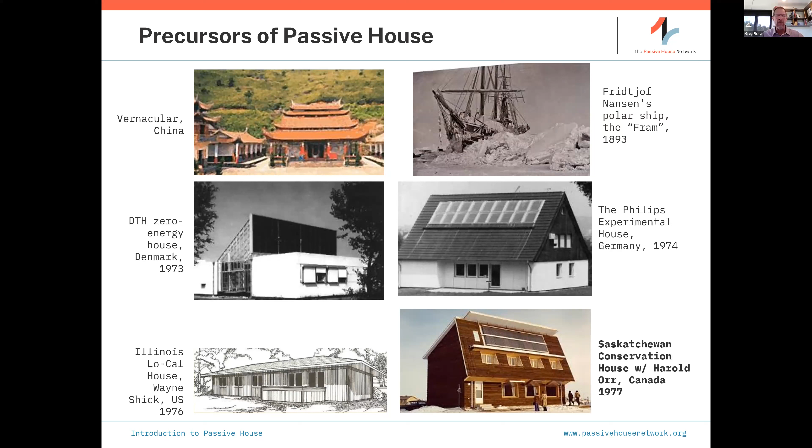The story goes that Amory Lovins from the Rocky Mountain Institute visited this building and provided the insight that these new developments could be standardized and scaled to great effect on the building industry. And from that time on, the Passive House Institute has continually conducted research, developed tools, and worked with industry and government partners worldwide to make passive house buildings the new normal.

So what changed? What was the discovery of this passive house experiment? What flipped in our thinking? What came out of this research was the essential power of the passive house concept, that despite our focus on energy efficiency and seeing comfort and health as a result of efficiency as side benefits, it is instead the focus on occupant comfort and health that drives performance. In other words, it starts with the occupant.

Per the purely functional or idealized definition as it was distilled, quote, a passive house is a building for which thermal comfort can be achieved solely by the post-heating or post-cooling of the fresh air mass, which is required to achieve sufficient indoor air quality conditions without the need for additional recirculation of air.

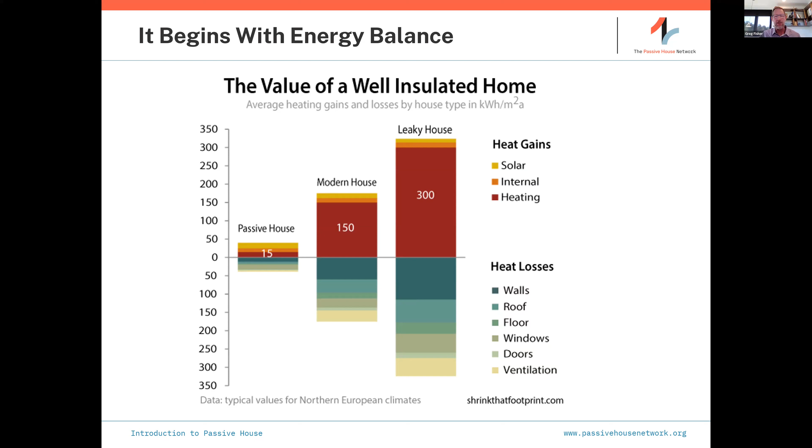In the old, very leaky and moderately leaky, shall we say, homes, large active heating systems are required to bring the building into balance, as the gains above must equal the losses below. While the passive house building requires a tiny fraction of the energy to be brought into balance. This dramatic reduction in heating and cooling demand demonstrates the power of optimized passive architectural structure and will flip our expectations.

It's like what we've experienced with our computer industry, where computers get ever more powerful while using much less energy. And so too, passive house decouples power from performance. Passive house provides a clear pathway to decouple and frees us to deliver zero carbon buildings today. This is a game-changing thing. Let's look at what passive house delivers now.

The passive house concept starts with the occupant, as we've said, and moves outward. What makes us comfortable? How about steady temperatures? How about no drafts, no cold feet, peace and quiet? How about sitting by the window on a cold winter day and still feeling comfortable like these two girls are?

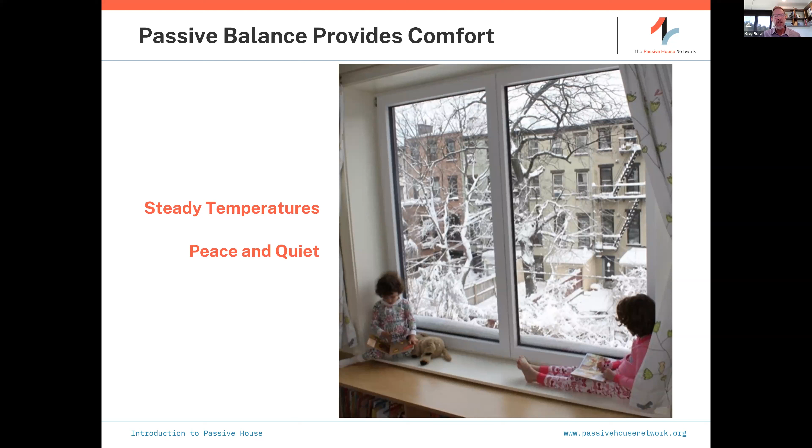Passive house provides hygienic indoor air quality, 100% fresh air and exhaust with no recirculation. It's filtered fresh air, keeping pollution out, no mold and associated illnesses, reduced asthma and reduced allergies.

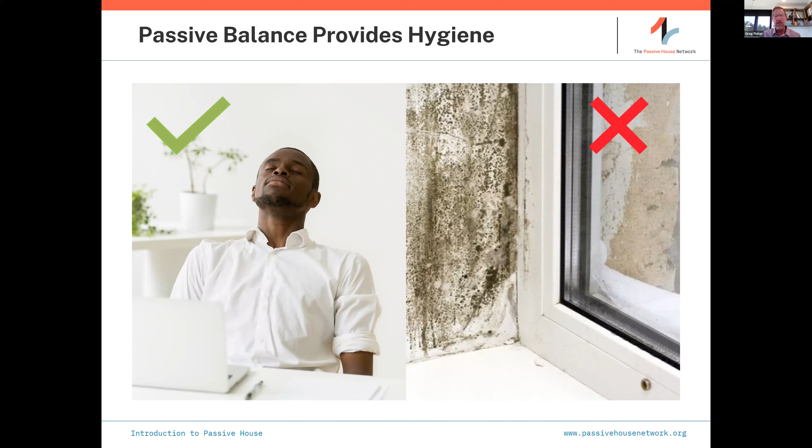Passive house provides resilience that we can shelter in place indefinitely in the winter and in the summer for an extended period of time, long enough for the power company to get things up and running again. And I've personally experienced that in my own passive house where we've had some outages and we've been nice and comfortable here for 2 to 3 days before noticing a problem.

This is an example from a home in Brooklyn, New York, several polar vortexes ago. The black line is the exterior temperature driving down and staying freezing for 4 days. The red line is the interior temperature, not a flat line, but steady. And we see the one moment when the family turned on the heat during the week where there's a bit of a spike.

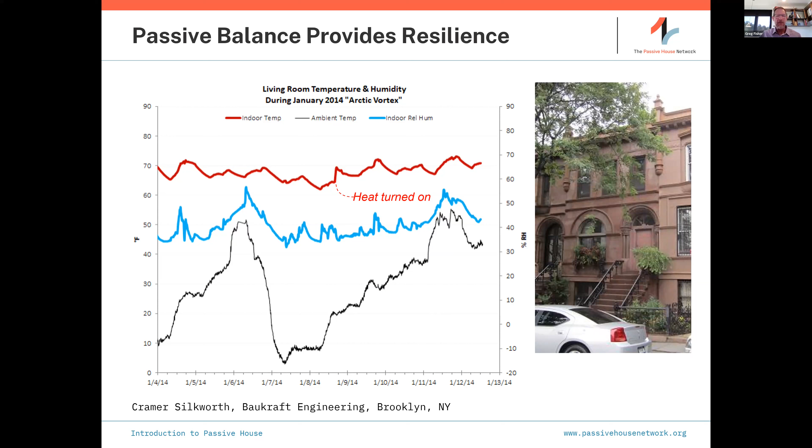Passive house supports our country's transition to a green grid and electrified future. The dramatic energy reduction of passive house makes removing fossil fuels from buildings economical. And with renewable energy options available on-site and off-site, passive house makes grid utilization more efficient and resilient. Consequently, the more passive houses we build, the less renewable production is ultimately needed, making our green transition more affordable and quickly achievable.

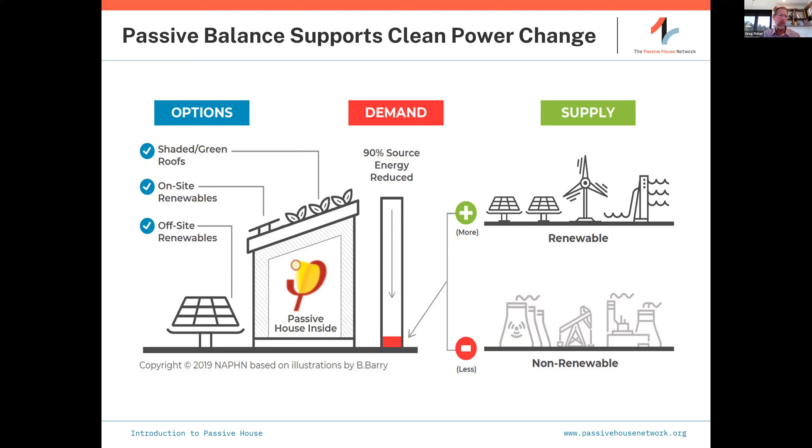To achieve the wide range of benefits a passive house building can provide, passive house doesn't look to more power first to solve problems. Instead, as designers and builders, we re-engage the passive building elements, the architecture, the structure itself, and empower it to do the heavy lifting. As you would first place the fulcrum of a lever in the optimal position to lift a weight before applying power to lift it. In our case, think of the enclosure as the fulcrum, and how we formulate the enclosure, like the placement of the fulcrum, has an equally profound effect on the power needed to provide comfort and health.

This flips our business as usual thinking. Consequently, Passive House makes us think and work differently. Passive House asks us to question everything, to effectively restart, like going back to the ancients. How do we optimize and empower the elements to do this heavy lifting?

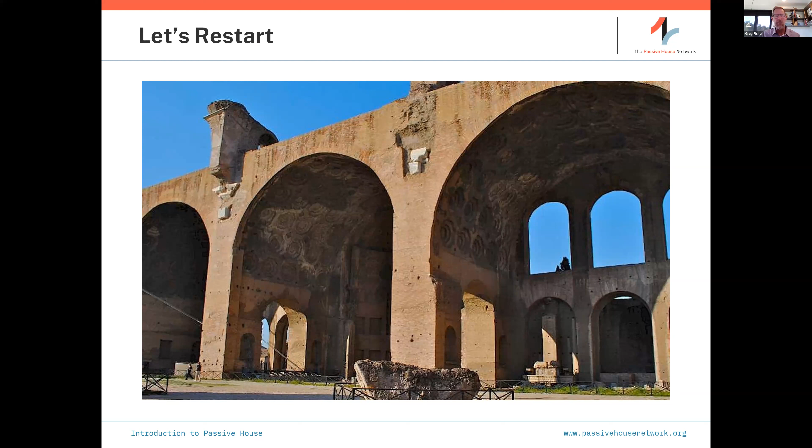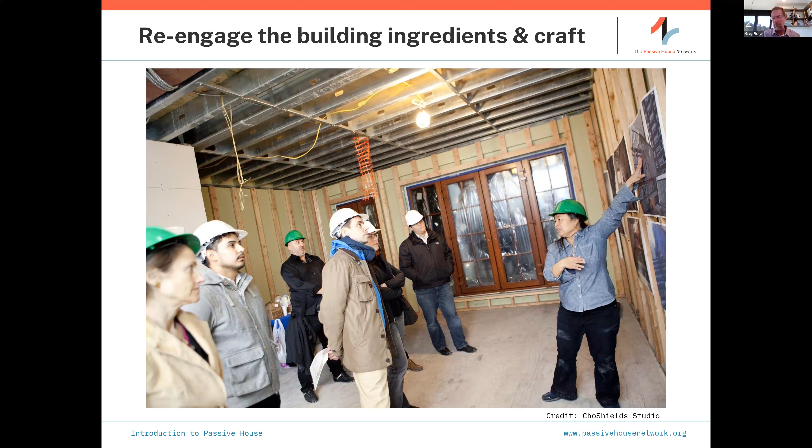And this goal, the quest of unlocking the power of the passive building structure, re-engages our focus with the ingredients, the recipes, the materials, the details, and the craft of building. It empowers and energizes the project team, from the owners to the designers to the builders and construction site laborers alike. Nothing is taken for granted. And this quest for passive building power has us designing and building with the energy flows and energy balance, not as far off abstract concepts, but instead as active tools that inform everyone's work.

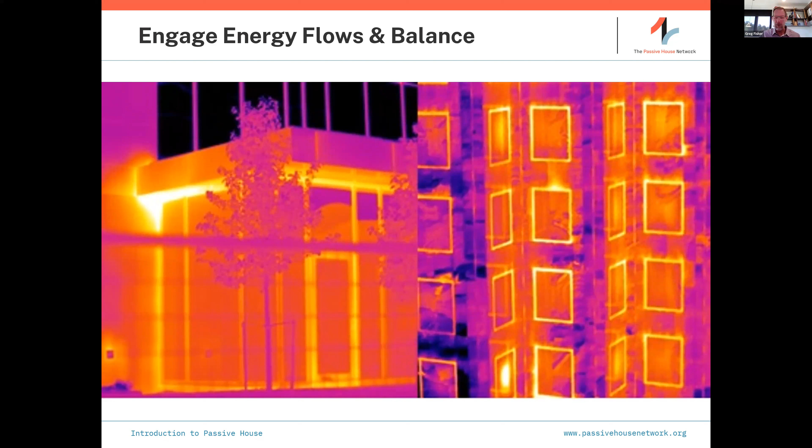And once we've decided to grapple with the idea that our architecture can produce such profound and far-reaching results, the challenge is really a simple question. Do we have the imagination? Do you have the imagination it takes? Don't be deceived by what you may or may not think is possible. Passive House is just starting.

And of course, there is housing. There's an affordable housing development in Norwich in the United Kingdom that won the Royal Institute of British Architects' highest award, the Stirling Prize. So here we have affordability, performance, and architectural design that is recognized all in one package. So with these few examples, I hope we can shake off any of our residual self-imposed artificial limits on what's possible. Passive House is no more a constraint to great design than any other programmatic element you're tasked with delivering.

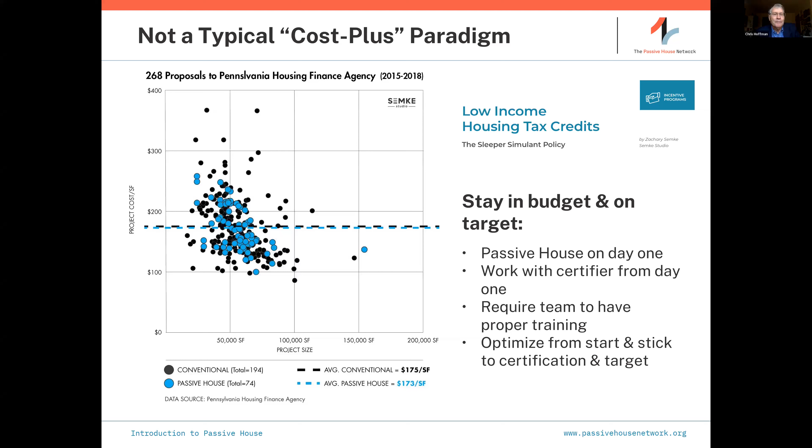So how is this possible? Easier said than done, right? May seem impossible on its face. I mean, how can you be at cost parity or close to cost parity and have all these amazing benefits? The key is predictability. You can fully optimize the performance and economics if you have a strong sense of predictability, if you can calculate accurately and execute to a clear plan.

So the Passive House Institute didn't just give us this new concept and say, hey, go to it, good luck, but instead provides a pathway, a methodology, and a wide growing number of tools to enable predictability. Building certification is critical, but there is much more to it. There are component certifications of essential components like windows and ventilation units. Be sure to check out the database of thousands of certified components on the Institute's website, and critical personnel certification on the design and construction sides.

The PHPP energy model, PHPP standing for Passive House Planning Package, it's an active tool in the design of the building. Reference materials abound from the Passipedia, the building database, and other corners of PHI's vast website. And PHI conducts ongoing cutting-edge research around the world with new uses, climates, new technologies, and new methodologies.

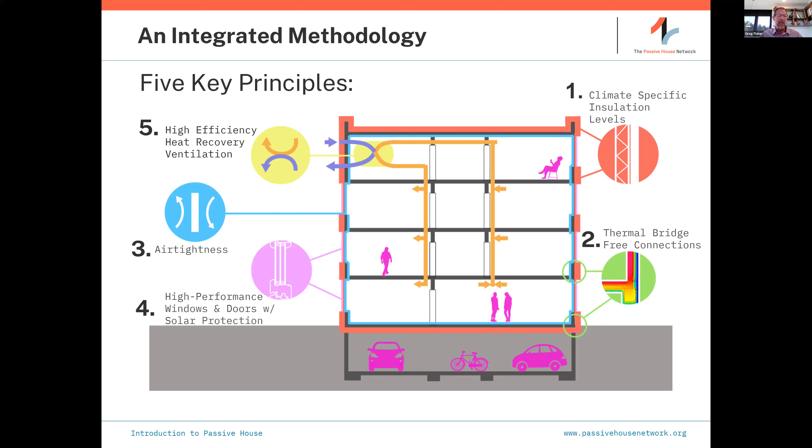We'll look at air tightness, high performance windows and doors, and high efficiency heat recovery ventilation. These are key ingredients or principles of passive house. These key areas and more are all entered into the Passive House Planning Package, or PHPP energy model. The PHPP is an Excel-based tool which allows the designer to simulate the behavior of the building both during peak times, winter and summer, and over an entire year. This flexible model allows for quick iteration and design alternate evaluation.

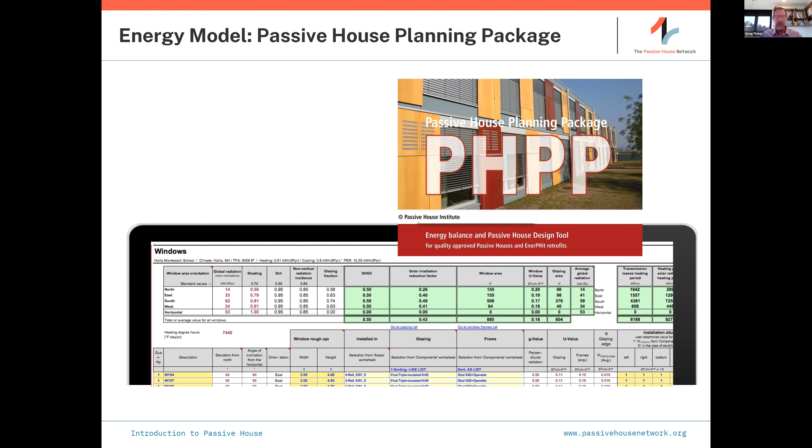The PHPP and all other simulations should be implemented not just as compliance tools, demonstrating that the building meets the standard, but as design tools which allow the team to iterate and evaluate a host of ideas and options, real-world assumptions, and possible future scenarios. This doesn't mean that the PHPP controls the design, but rather that it helps to inform the design with performance data throughout the process. This is the essence of data-driven design, frankly, of good design.

Greg, here's another question that's come in. It says, I understand that there is an international design code for passive house design, but that it's rather rigid and difficult to implement. Is that true? And do you advocate adhering to that code, or are you in favor of other less rigid design principles? I get concerned about resistance to requiring another building code.

Yeah, legitimate question. What I would first say is that Passive House does not mandate how you build. Passive House mandates how the building will perform once you have built it. So there are many, many ways to skin the cat of creating a Passive House certified building. You just have to live up to the performance criteria, which has to do with the amount of energy consumed for heating, the amount of energy consumed for cooling, how airtight the house is, and having the house properly ventilated so we don't have sick building syndrome from folks getting sick inside.

So when I think about the question being about this as a building code, I don't see it as a code. I just see it as a performance mandate, and there's many ways to get there. Not to say that there aren't very good and impressive buildings being built that are not built to Passive House standard, but I believe the Passive House principles are very important in achieving.

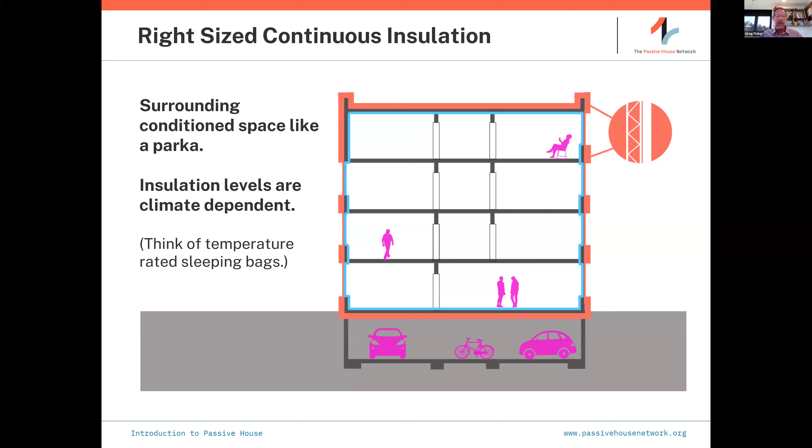Second principle of Passive House then extends this thinking to make sure we don't have breaks in the insulation. In typical construction, thermal bridges may not seem important in isolation, but they can completely undermine the building's performance when you add them all up. If we think of a thermal bridge as a cut, your project can easily die from 1,000 thermal bridge cuts, so to speak.

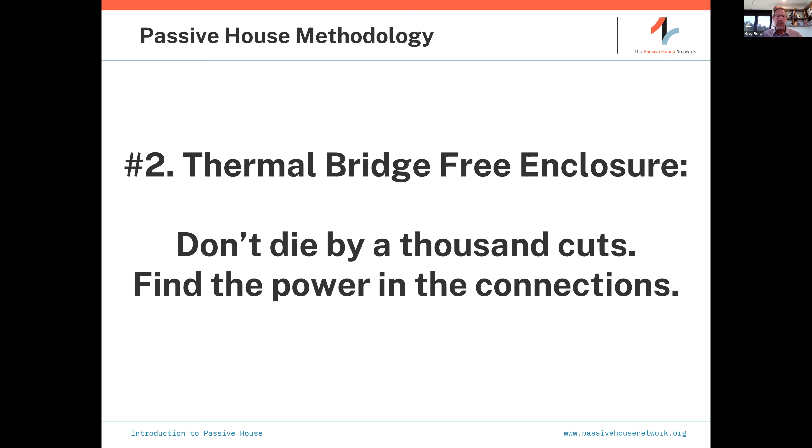Here's some examples of thermal bridges, and they abound, but the thermal image on the lower right shows the common balcony connection, turning the building into a radiator to the world. So what you're seeing there is basically the heat being conducted out of the building and into these balconies and then radiating out. The colder interior surfaces can cause condensation, as we can see on the window frame in the upper right, and worse yet, mold on the left.

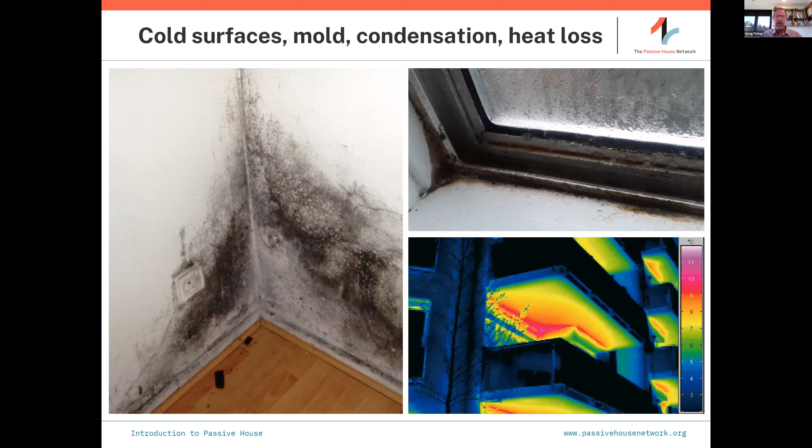To overcome these issues, typically we overheat, treating the symptom with brute force. With Passive House, we first avoid the problem in the first place rather than treat it. Thermal bridges typically occur at junctures where the floor meets the wall or wall meets the roof, or at window frames meeting walls or balcony connections. The energy loss causes thermal discomfort and condensation and moisture damages.

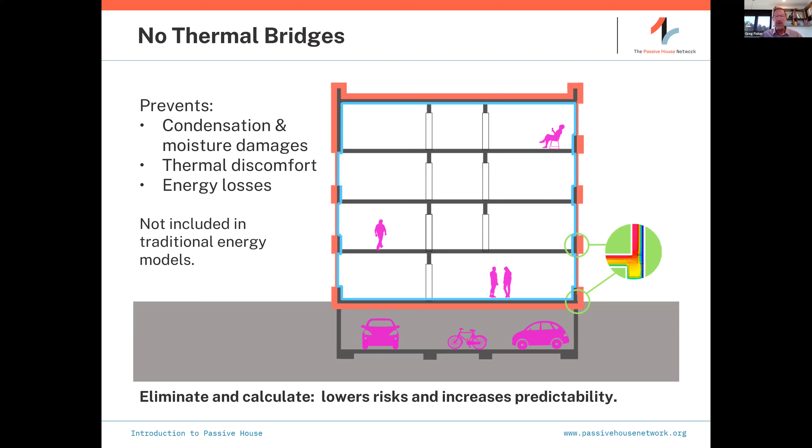Traditional energy models don't account for thermal bridges, and this is a big contributor to the oversizing of mechanical systems, just to be safe, so to speak. In Passive House, we look carefully at all of these connections and junctures, working through the construction details, and eliminate the thermal bridges entirely or minimize and calculate them if we cannot eliminate them. We include them in our PHPP energy model, and this results in increased predictability and produces lower risk construction.

The third principle is an airtight enclosure. And while when the subject comes up, people might reflexively clutch their pearls and worry about poor indoor air quality and perhaps succumb to nightmarish imaginings of not being able to open windows, we need to set the record straight at the start. Two concepts are in play: quality indoor air and our freedom. And so we need to flip the common and wrong-headed thinking on both.

First, let's address quality. The fundamental idea at work here is that it is very difficult to control the quality of something if you don't first have control of the thing itself. If the enclosure is leaky, the polluted outdoor air is moving willy-nilly through the building. Consequently, the only way to have any sense of control is to overcome it with power, never sure if this space or that space is properly ventilated, like thermal bridges where we're treating the symptoms with more brute force. But in an airtight environment, the air is under control and we can very differently and confidently maintain its quality. Airtightness sets the table for healthy indoor environments.

But you might say that's all well and good, but the passive house police won't let me open the windows. It's fascism. Quite the opposite. Of course, there are no passive house police. You can open the windows, but let's think about it. You often open the windows when the indoor environment feels unhealthy and uncomfortable, and you need the fresh air. It's not a want, it's a need in those cases. But in a passive house, you have clean, fresh air, whether the window is open or closed. You don't need to open the window. You open a window because you choose to. It's a lovely day. Open the windows and let the breeze blow through. How nice is that? Passive house is actually giving you the freedom to choose.

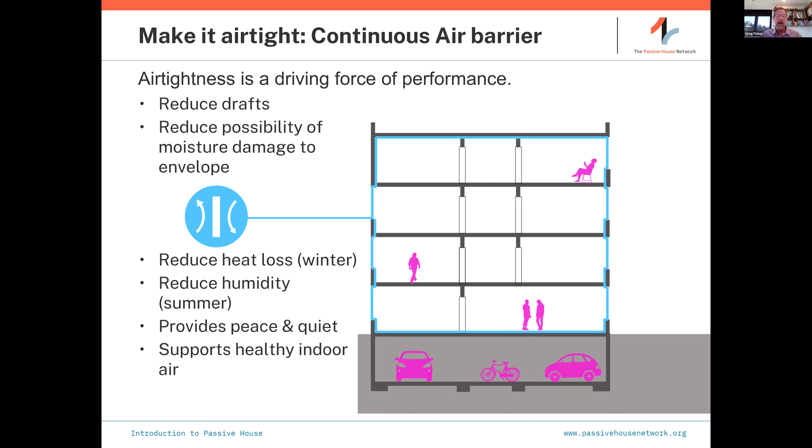And in hot, humid climates, airtightness keeps the humidity out and reduces the demand for dehumidification, allowing the cooling system to be sized mostly for cooling as it should be. For all these reasons, the truth is that a building can never be too airtight, and passive house takes full advantage of this truth.

Fourth principle is high performance windows and doors. The flip here, as we spoke in the beginning, is to rid ourselves of the unfortunate association people make with passive solar buildings. And we must always be on guard to avoid overglazing and the accompanying overheating. The passive solar buildings of the 70s and onward were overglazed, out of balance, and often very uncomfortable. If you can recall, the precursors to passive house in the 1970s were not passive solar buildings. They tended to be super insulated buildings that balance daylighting needs and solar heat gains and losses.

Passive house buildings don't have tiny windows either. We're not building caves. Expansive views abound. We will utilize passive solar heat gains, but we are being very conscious about the energy balance, about solar protection and the consequences. Restraint might be a good word for what we're showing off.

Key concept here is that the windows and doors act not simply as a provider of views and daylight, but they're a critical component in our continuous insulation and air tightness. The windows themselves are often triple pane and truly thermally broken and airtight with 3 layers of gasketing typically. The window connections to the surrounding construction and airtight insulation control layers must be airtight and insulated. Thermal bridge free connections, of course. This all gets you deep into the construction details.

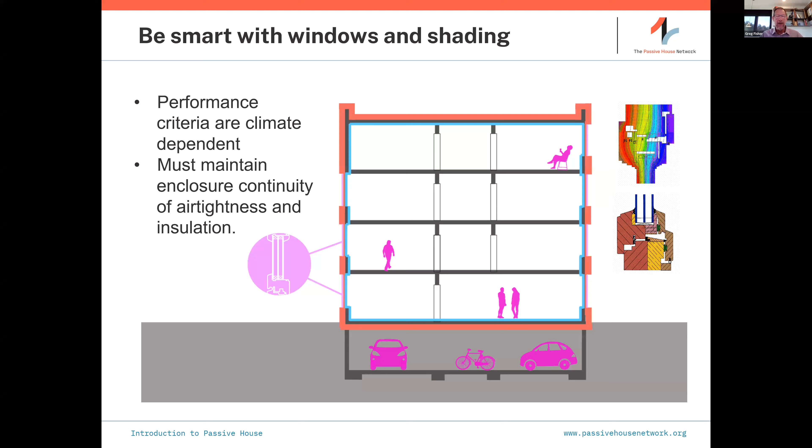Window quality is a primary driver of comfort, of course. And while there are a myriad of factors, the fundamental idea here is that our typical windows, our code windows, result in significant temperature asymmetry. In winter, the window is colder than the other surfaces and you feel it. It causes convective currents, and this needs to be overcome with perimeter mechanical systems. With passive house, the windows are of a quality that the temperature is close enough to avoid discomfort and avoid the need for mechanical systems to compensate for this.

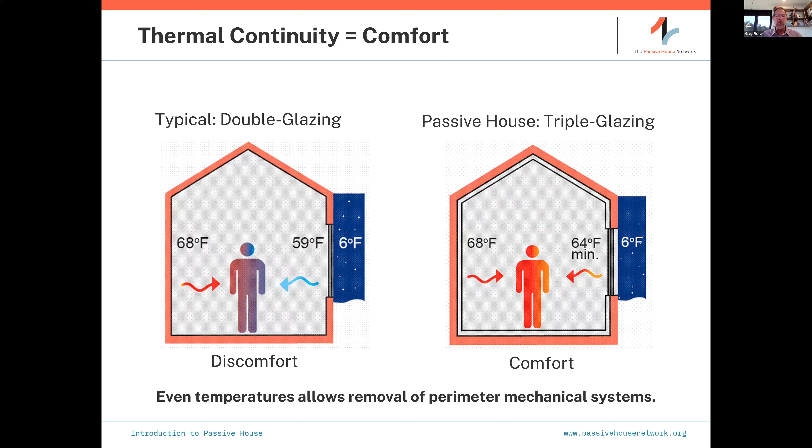Because windows are such a critical component and their performance cannot be compromised, we recommend the Passive House Institute certified windows are the ones that you utilize. Like airtightness, high quality, high performance windows disproportionately affect the overall energy balance performance of the building. They offer greater design freedom, flexibility, and options. They provide value that cannot be appreciated in an isolated budget line.

And while windows provide our views and daylight and yes, useful passive heat gains, improperly designed windows can cause significant overheating, causing discomfort and additional air conditioning requirements. And we know that overheating is a common problem in conventional buildings across the industry today. The best approach to avoiding overheating is to carefully provide proper shading. Shading can be provided by how the window sits in the wall, an architectural element, or using landscaping. Needed shading can be achieved with interior blinds, but exterior shading is the most effective, keeping the heat out. Shading cannot be an afterthought. It cannot be optional. It has to be design integrated.

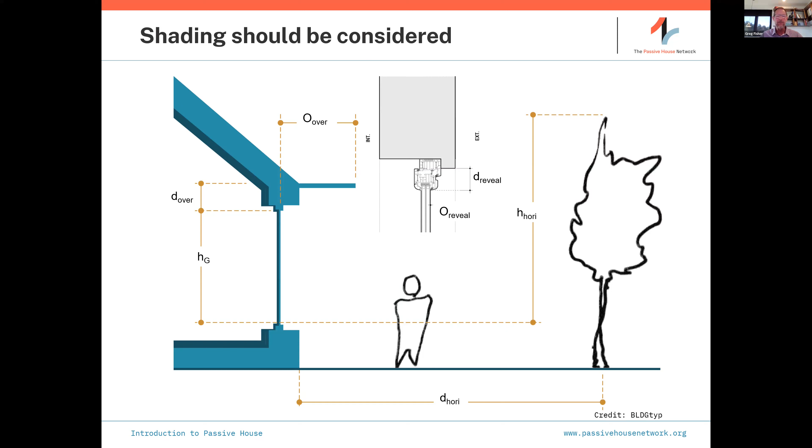The fifth principle is high efficiency heat recovery ventilation. So let's think back to the definition of passive house. The primary goal was to ensure effective hygienic ventilation. Today, and in the recent times of coping with the COVID-19 pandemic, hygienic ventilation has been a hot topic. Add to that the inescapable forest fire smoke and the long history of poor health outcomes for marginalized communities on the fence line of industrial production. And of course, hygienic ventilation should be a foundational goal.

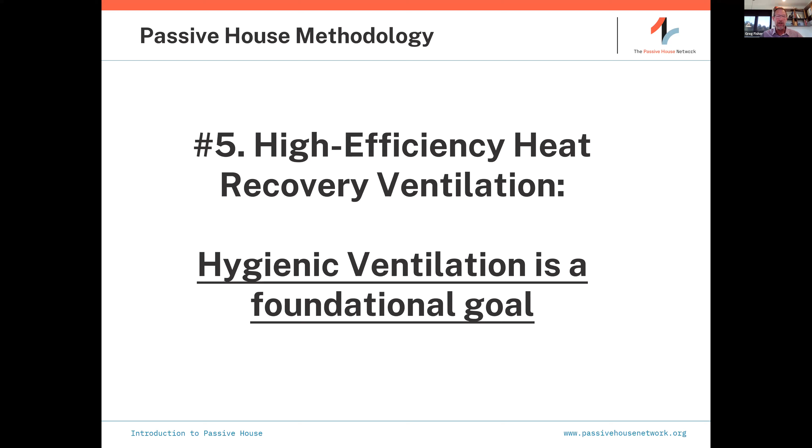And remember also that what is going to set us up here for success is the airtight enclosure. There's no pollution entering willy-nilly as happens in typical construction. We have control of the interior air. Now, typical buildings have ventilation systems, just bad ones, often providing only intermittent exhaust from bathrooms and kitchens that don't ensure good ventilation everywhere. And in commercial buildings, often includes a lot of recirculated air.

In a passive house building, we supply 100% fresh air to every served space, bedroom, living room, office, classroom, etc., and 100% exhaust from every service area, bathrooms, kitchens, utility areas, and this all operates continuously 24/7. The systems are laid out to ensure that all spaces have robust ventilation. Again, there is zero recirculation.

Now, such a system of 100% air changes would normally be prohibitively expensive to operate because typically you need to heat or cool that fresh air to maintain comfortable interior conditions. But this gives us the passive in ventilation because there's a passive heat exchange element located with the fan unit. This allows the heat and energy from the outgoing airstream to move to the incoming airstream. And today, the efficiency of this passive exchange can exceed 90% or more. This means that on a cold winter day, the fresh air supply without any added heat enters the room within just a few degrees of the room temperature, ensuring occupant comfort. And Passive House Institute certified ventilation units ensure that you get the performance and cost savings you expect.

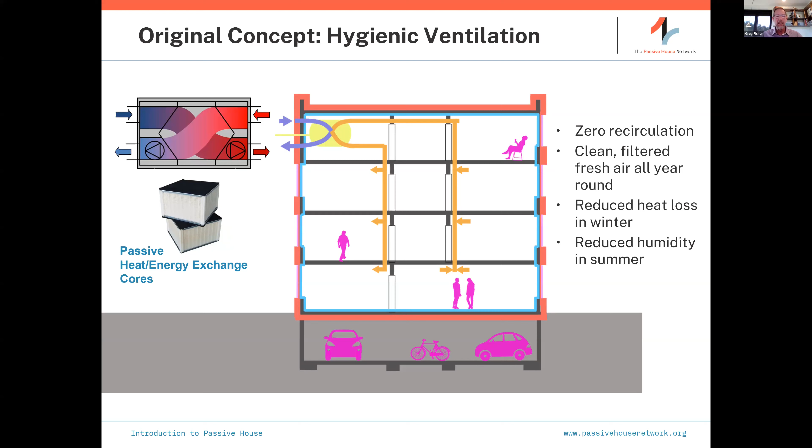In looking at the energy balance of the buildings and the building design, we're also going to look at the things that provide internal passive heat gains as well. Things like people, appliances, and equipment, the lighting and mechanical systems, because they can contribute significantly to providing the heat needed in winter. It all goes into that PHPP model we talked about earlier.

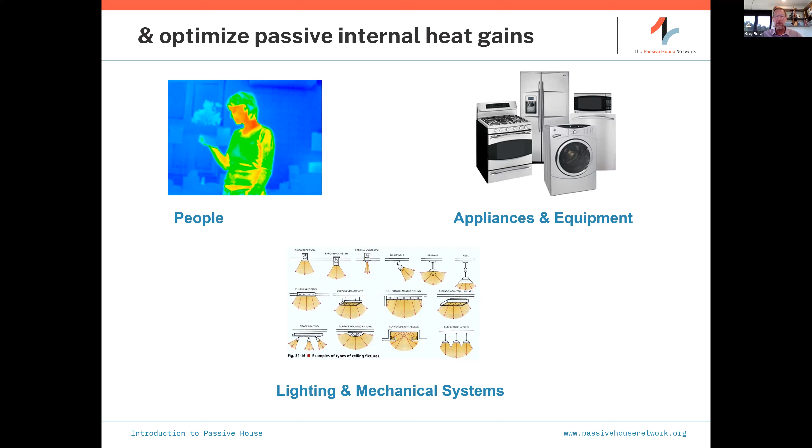So at this point, moving through the building design, the metaphorical fulcrum is pushed as far as it can go. The architectural design and other passive elements are doing the heavy lifting. Like the Gothic cathedral we looked at earlier, the architecture is doing the work again. We've minimized the need for active heating and cooling and dehumidification. But depending on where you are, there will likely be a need for active heating, cooling, and maybe even dehumidification, just greatly reduced. It's important to remember that this is about optimization, not magic tricks.

So what we see is the ability to meet the occupant needs with a 75% reduction in mechanical equipment sizing and up to a 90% reduction in usage of energy. We can pull the distribution to the core of the building, and because the loads are so low, electrifying everything is economical. We can get rid of the hydronic heating if we like and provide heating and cooling from a single heat pump system, as the questioner was asking about earlier.

The only trick here is perhaps getting the mechanical engineer to agree with the plan, because at first glance, they might see a building that will fail. I mean, how could it not with such a small mechanical system, right? It can take a few meetings, but with careful explanations, even engineers who we've seen initially energetically opposed can become ardent supporters. We need all engineers out there on board. We can't do it without them.

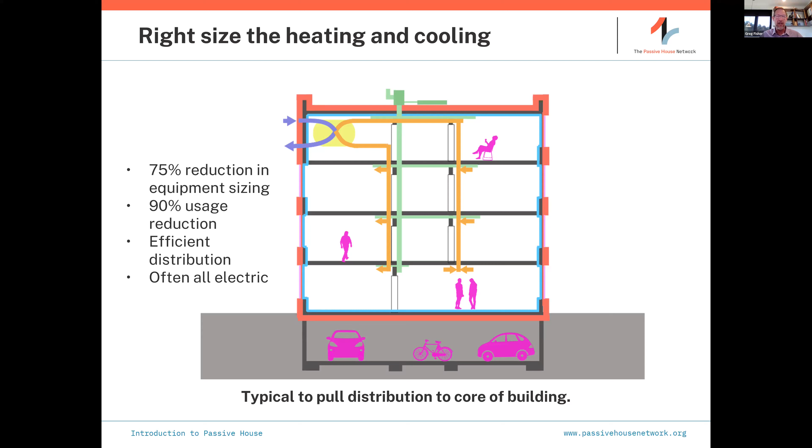And then there are smart systems. Passive house isn't opposed to incorporating smart systems and technology. Even the first passive house had to have a CO2 detector to help control proper ventilation. But the smart system should enhance high performance. They should not be used to compensate for poor performance. So let's make the architecture do the work. Let's incorporate only the most efficient equipment, and let's add smart systems as we like, but always with an eye towards greater simplicity. Let's simplify, simplify, and simplify some more, because our resilience depends on it.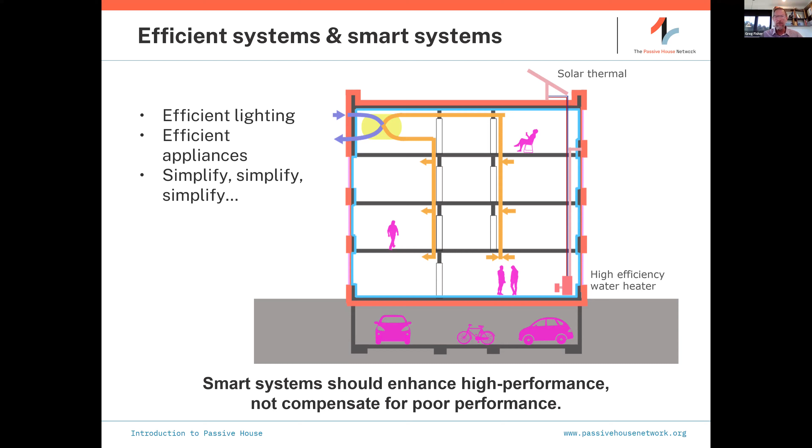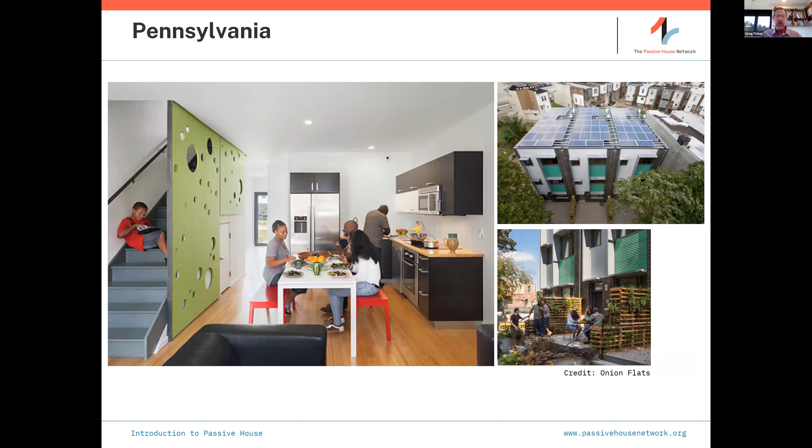So as the world heads toward climate tipping points, and we plainly see the interconnections of these crises, let's have the imagination and determination to seize the inherent power of building and really leverage it, so that we can confidently deliver better health outcomes, support greater equity, and deliver climate action proportionate to the emergency.

We see the push to zero carbon emissions on the horizon across the board and coming at us fast. Let's not wait another day, but instead let's set ourselves up to meet that world by building passive house buildings now. So are you thinking differently? Are you ready to act? I hope so. And I hope to see you at future Passive House Network, Passive House trainings and events.